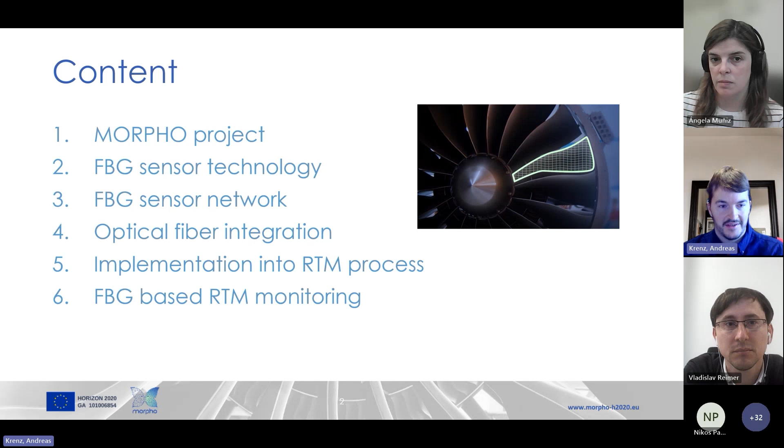Okay, about the Morpho project, I think it's not new, but a short slide about this: Morpho is an industrial research project which aims to develop a smart aeronautical part, in this case an engine blade, and to give them cognitive capabilities using sensors to optimize their manufacturing and their life cycle management.

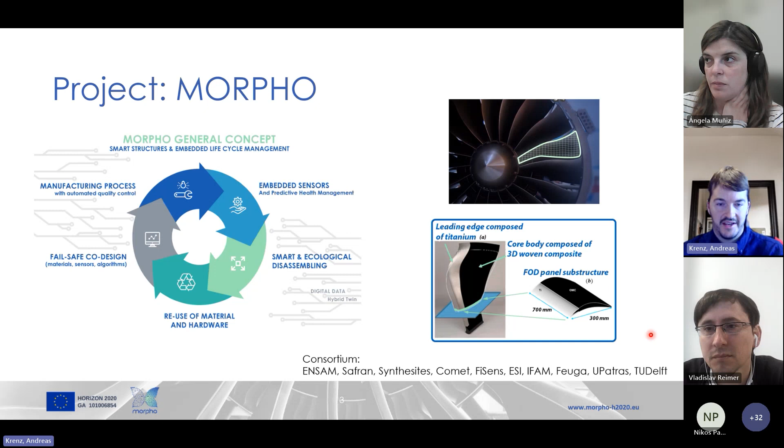The research is being realized in the Morpho project with these FOD panels, which are pictured in this image. This has the core body of a 3D woven CFRP part and a metal leading edge protection. Some more details on these FOD panels, where we integrate this sensor technology, will be shown later in this presentation.

About the sensor technology, as Mr. Reimer already presented, FBGs are nothing more and nothing less than microstructures in glass fibers. It's possible to use these microstructures to measure strain or temperature, because if you stretch or compress this part of the optic fiber, the wavelength which is reflected in this microstructure is shifted. And if you shift this wavelength using strain, it's possible to measure it. So you have the sensor just having a glass fiber.

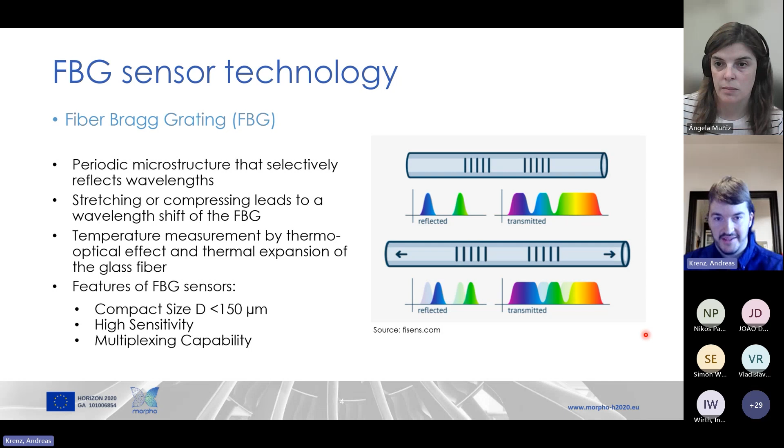The same goes for temperature measurement: the thermo-optic effect and the thermal expansion of this glass fiber can be used for measuring temperature. So the main features of the FBG sensor are the compact size, the high sensitivity, and the multiplexing capability. And some more details about the FBG sensor and signal are on the slide.

The main aspect of this signal response, as Vladislav Reimer already presented, is the wavelength shift, and also the intensity shift, if you want some additional information depending on the environment the sensor is used in.

As for the sensor network, in the Morpho project the sensor network has to fulfill 2 main requirements. It should be usable for the RTM monitoring, for detecting the resin, and also for the SHM of the manufactured part, for example performing strain or temperature measurements. Our approach was, in general, a symmetrical longitudinal FBG sensor arrangement for these two requirements, but mainly for the RTM monitoring, to have this array of sensors in a line to detect the resin flow.

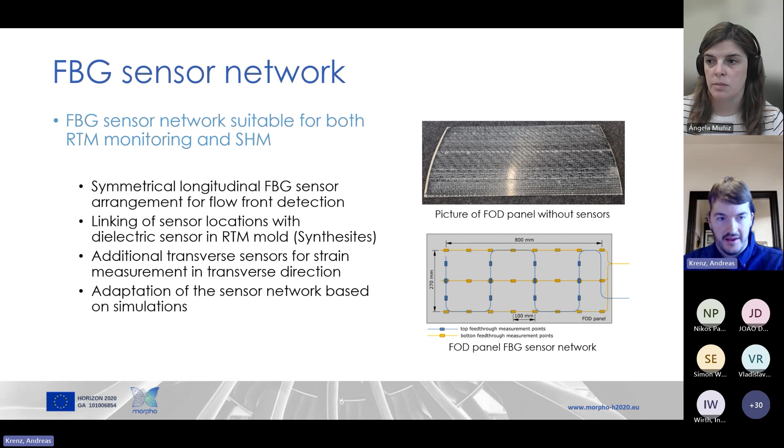Okay, so now to the integration of the FBG sensors. In the Morpho project, there were two different approaches of the integration of these sensors into the component. The first one is the automatic sensor integration within the weaving process of the preform. So during the fabrication of the preform, there were two sensor arrays integrated automatically during the weaving process.

As you see in this overview of all the integrated sensors, you see the automatically integrated sensors in these dotted lines, which were used there. And the second approach for integrating was the manual sensor integration, by hand, using steel capillaries. And on the next slide, I want to show some details about the manual optical fiber integration into the preform.

And as mentioned, it was performed by the insertion of a steel capillary as an aid for integrating the fibers. And this video shows the procedure of embedding into the outer surface area of the preform. And there you can see the manual way to insert the steel capillary.

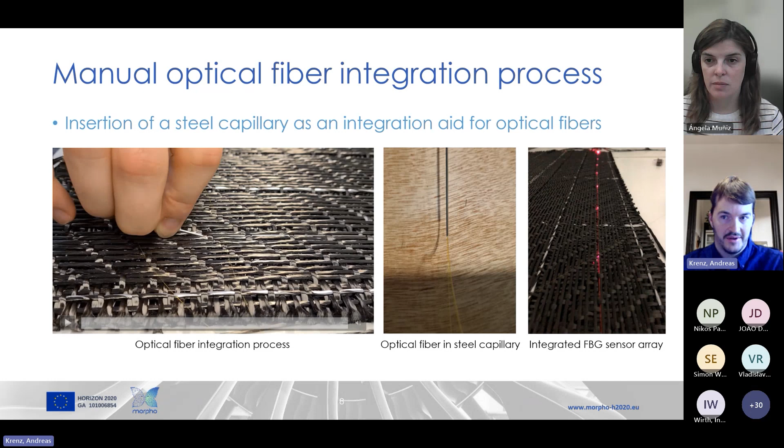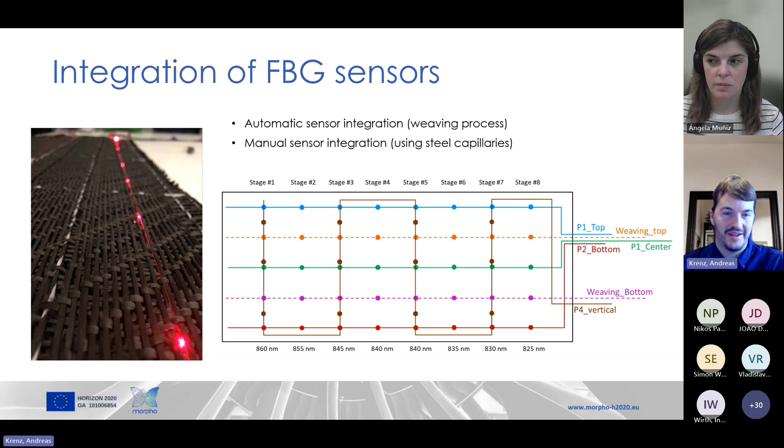But as you remember this overview of the FOD panel, there were a lot of sensor arrays to be integrated in one FOD panel, so we had a lot of work to do with one single FOD panel, integrating these fibers in this way.

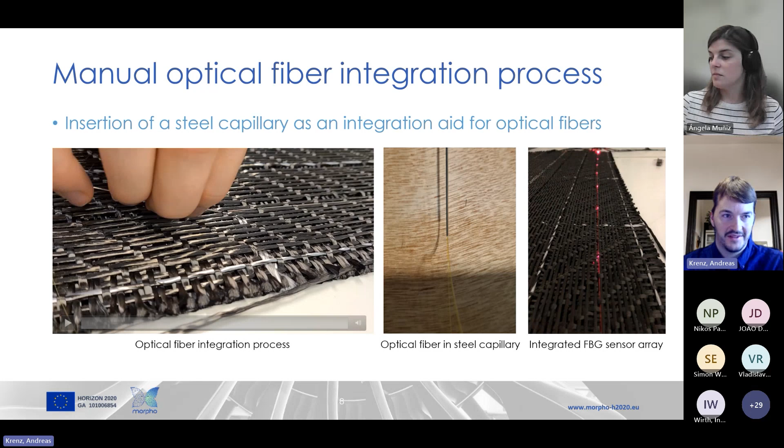And these connectors or ferrules were cast into silicone to protect them during the RTM process and embedded in the edge areas of the preform. And the fourth solution was the embedding of the bare fiber in a glass vial, which is also cast in silicone in a rubber protective to protect it during the RTM process.

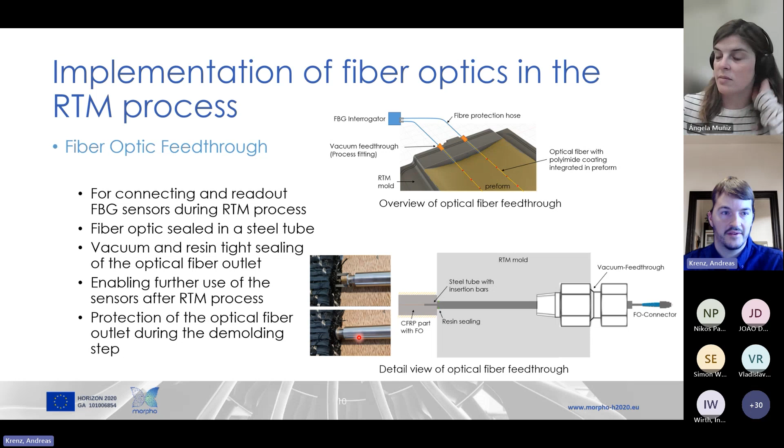And actually, in the further course of the project, they were bonded for a positive form-fit connection to the resin and to the FOD panel. And this was the way to implement the optical fibers into the RTM to realize the RTM process monitoring during the RTM process.

And to the topic of RTM monitoring using FBG data, here's an overview slide about our way to do it. It has been confirmed that the arrival of the resin resulted in a decrease, or as you see here later on, a decrease or increase in the wavelength of each sensor. And a factor based on our experimental results was used to serve as a limit value for the wavelength shift in relation to a specific interval. So if the resin arrived and each sensing point has this wavelength shift, we can say using this factor that the resin arrived there.

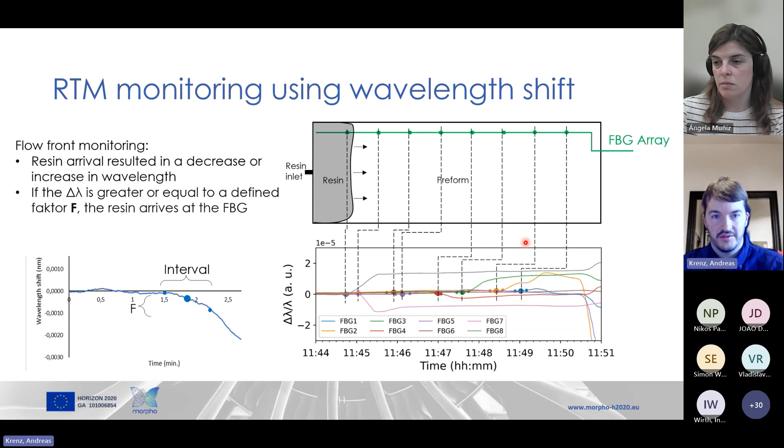And this figure shows the passage of the resin going through the FOD panel from the left to the right and passes all the FBGs in this array. And here's the associated FBG signal, which shows an increase or decrease of the signal. And using this FBG-based data it is possible to have this RTM process monitoring.

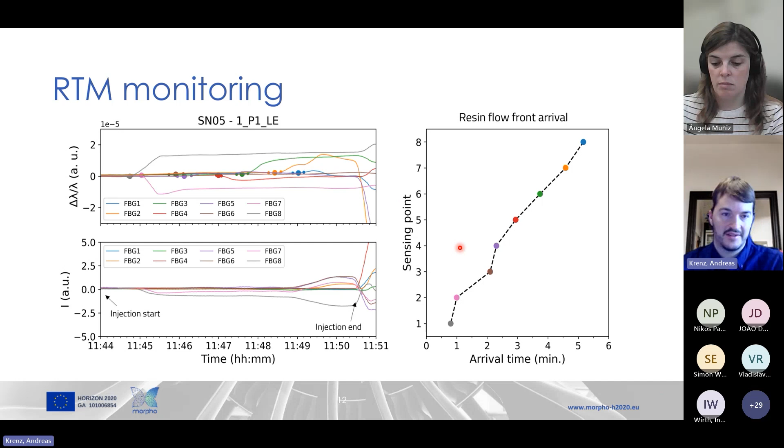I think Vladislav showed the same picture of this characterization or visualization of the RTM monitoring using this FBG data. You can see the arrival time at each sensing point, and this results more or less in a straight line, and so it could be used to characterize or visualize the process. And also a map of the whole FOD panel can be created on the basis of this FBG data, which shows the resin arrival at each sensing point.

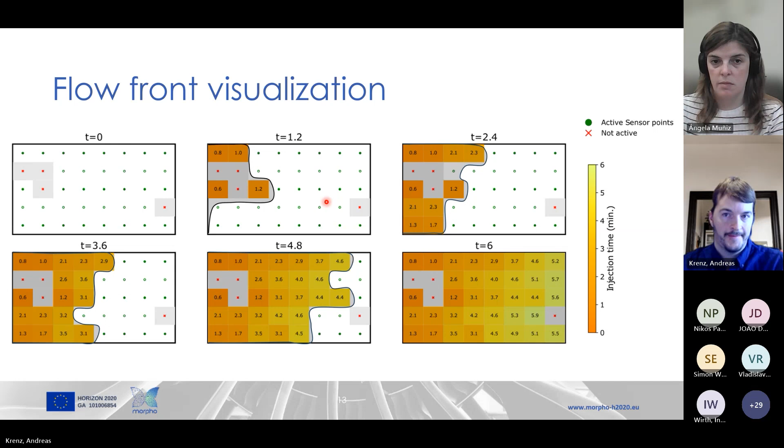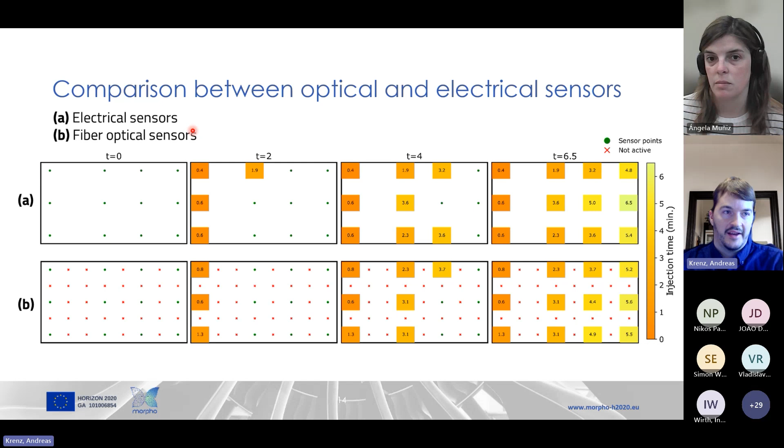Okay, and to my last slide. As I mentioned, the FBG sensors for the RTM process monitoring have a good correlation of the resin flow between the optical and the electrical sensors. The major challenge was integrating the sensors in such a way that the fiber survives the compression phase of the RTM process and enables the further use of the FBGs for the SHM later on.